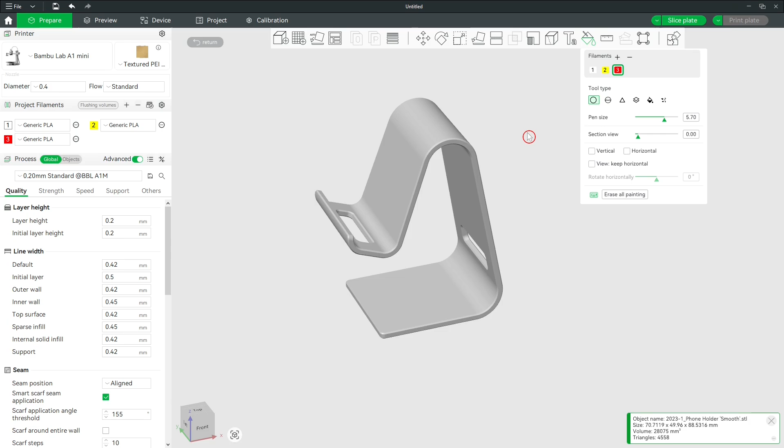Here you can select the color to paint with. Let's start with the circle tool. Change the pen size here, or press Ctrl and move the mouse wheel. Click and hold the left mouse button to start painting the selected areas.

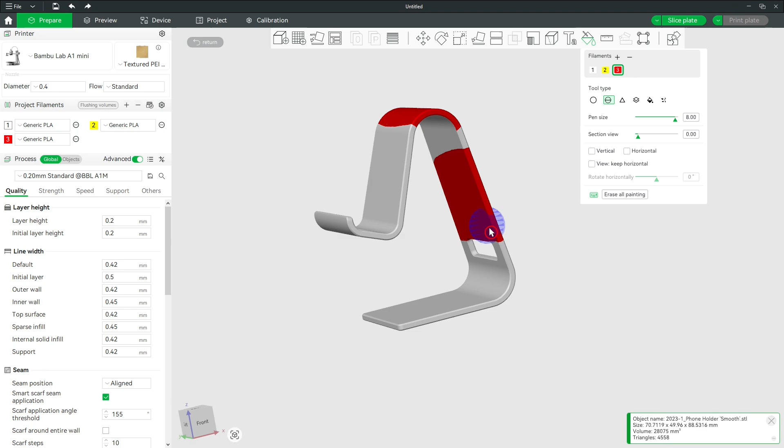Now let's try the sphere tool. It works almost the same, but the difference is that it goes through walls. The inside is also painted, as you can see. Let's paint some more with the sphere tool. You see both sides are painted in one action.

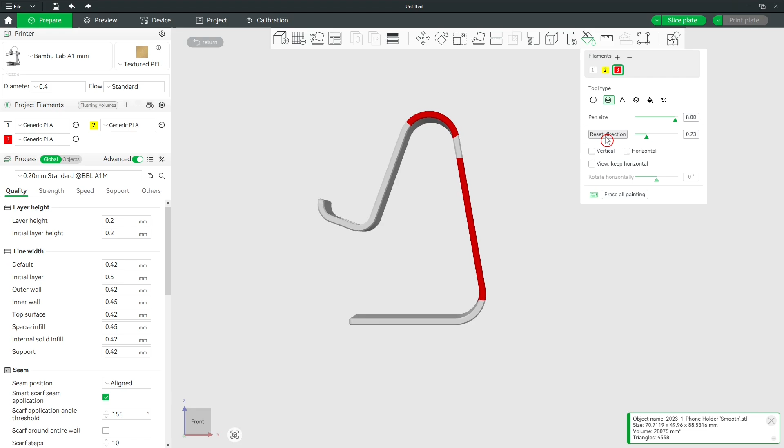Here you can enable a section view of the model. Click Reset Direction to cut along the current view orientation. Let's change to a side view with this cube and click Reset Direction again. It will now cut along the side view only.

When checking vertical, the paint will appear in that direction only. Let's change the view orientation perpendicular to the model to see this better. Click this button to erase all painting. The same goes for the horizontal checkbox.

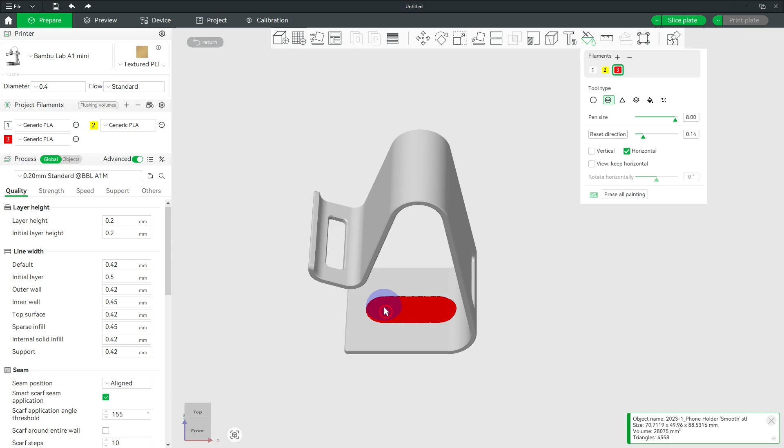Erase all painting again. Let's switch to the yellow color and select the triangle tool. This 3D model consists of many triangles.

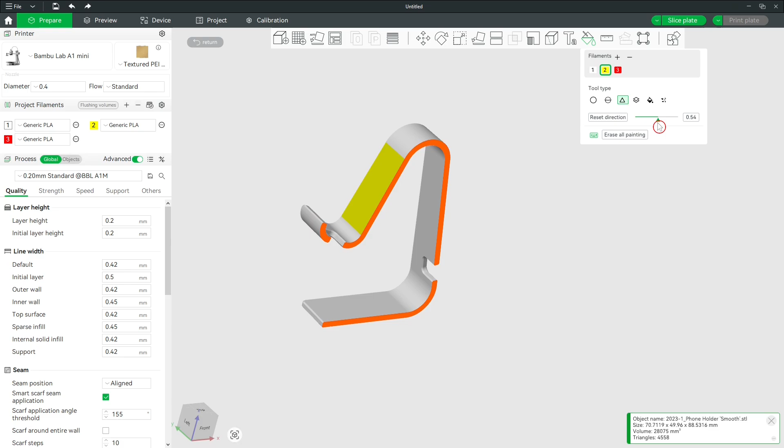Hover over this icon to see which hotkeys are possible to use. Hold Alt while using the mouse wheel to change the section view. Press Alt plus Shift plus Enter to change to a wireframe model to see the triangles. Now you see how this paint tool works.

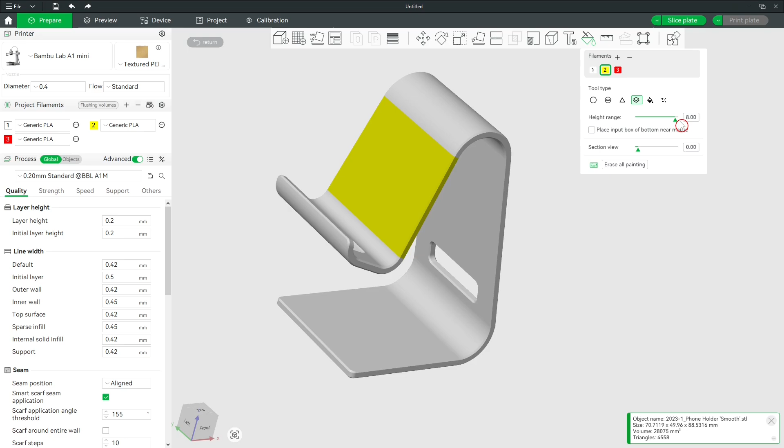Let's switch to the height range tool and change it to the maximum level. Now you can paint a specific area at a specific height. Click to paint this region with the selected yellow color. Also make one region red after selecting this color.

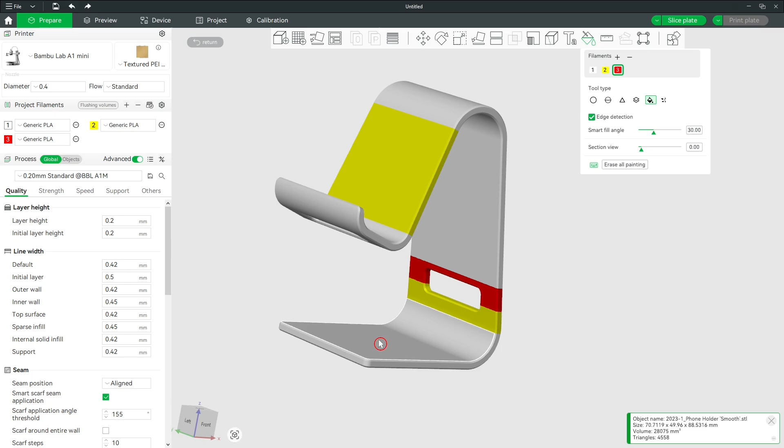Let's move on to the fill tool. All similar surfaces can be filled at once. Hold the left mouse button and drag the mouse to paint faster. This model can be painted in no time.

The gap fill tool does not apply here. There are no gaps in this STL model to fill.

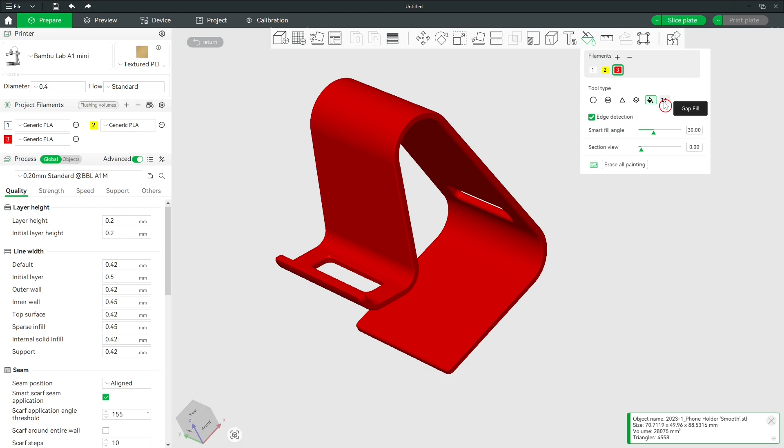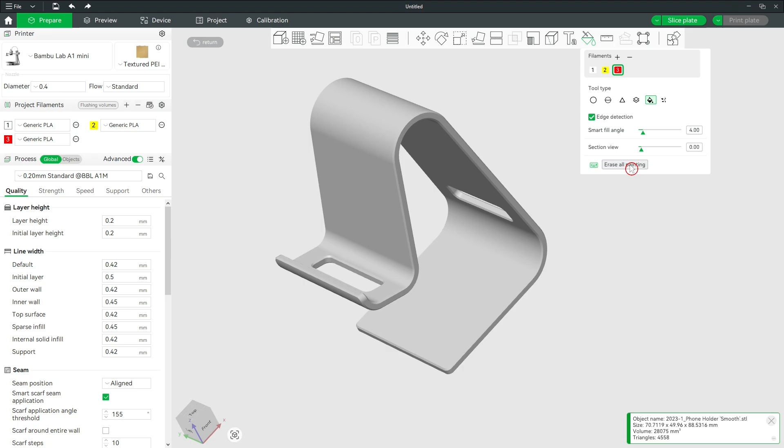Click this button to erase all painting again. When you uncheck the edge detection feature, the whole model can be painted with one click. You can change the settings for your model as desired. So if you want to paint it fast, uncheck the edge detection box and click the model.